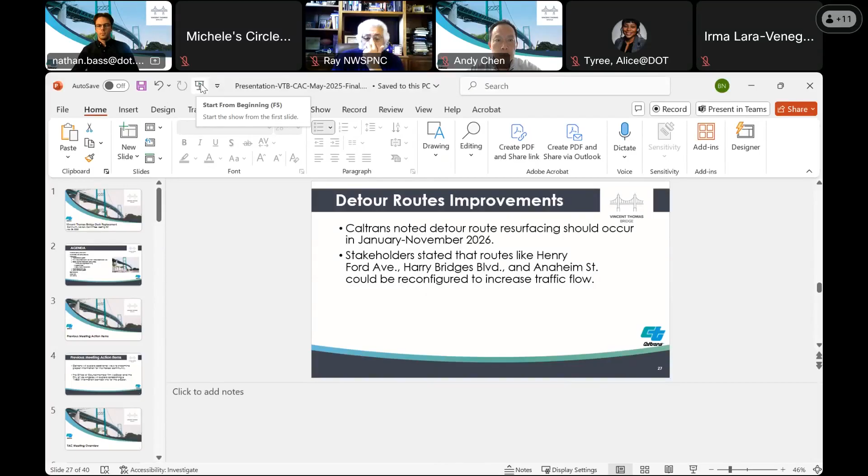And on your end, are you seeing the full screen of the PowerPoint, or are you seeing the presenter view? Presenter view. Okay.

All right. Is that better?

Good evening. Thank you for joining us for the 21st Community Advisory Committee meeting for the Vincent Thomas Bridge Deck Replacement Project. We have a very packed agenda, so I'm going to move on to the next slide and kick us off first with attendance.

So I'm going to run through... sorry, I'm working from a different desk than usual, so I'm going to have some technical difficulties on my end.

I'll run through the Caltrans personnel in attendance today. First, we have Diana Jimenez. Good evening, everyone. Diana Jimenez, Public Information Officer for Caltrans District 7.

Andy Chen. Good evening, this is Andy Chen. I'm the bridge construction engineer for this project on Caltrans.

Thank you. Wilfred Domingo. Hi, good evening everybody. Wilfred Domingo from Caltrans Office of Mobility Programs.

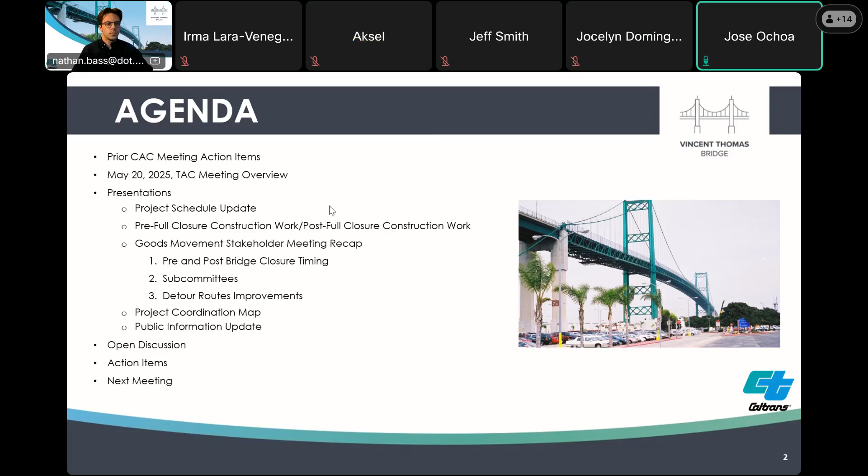Great, it looks like we have Michelle Grubbs, Circleback AI Notes joining us. I don't know if they'll say hi.

Nihar Desai, could you please introduce yourself? I think you just joined, so I'm putting you on the spot. Yeah, hi, Nihar Desai, I have property interests along Alameda Street, so I was invited by the council member to join.

Got it. Ray Regalado. Hi, Ray Regalado, community member, Northwest San Pedro Neighborhood Council President.

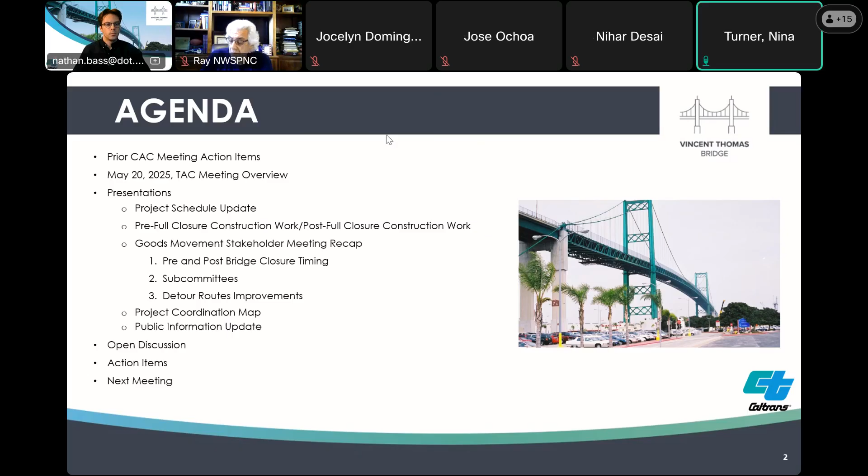Nina Turner. Good evening everyone. Nina Turner, Local and Regional Government Relations at the Port of Long Beach.

All right, thank you, I think that is everybody. And I hope you've had time to review the agenda.

We'll be going over first the prior action items from our prior CAC meeting in April. We will have an overview of the TAC meeting that we had last week.

And we'll have presentations over the project schedule, the pre-full closure construction work, and post-full closure construction work, the goods movement stakeholder meeting recap, which we talked a little bit about in previous meetings, is a sort of consortium at this point of different stakeholders from the ports, from industry, and different parts of government working on aspects of our project, like the TMP.

As you'll see, there's some sub-presentations within this goods movement stakeholder group recap, and they'll touch on the various subcommittees and issues that stakeholder group is covering. We'll have another update from our project coordination map and our efforts there, an update on public information, and then we'll have a discussion period after all those presentations, record any action items, and announce the next meeting.

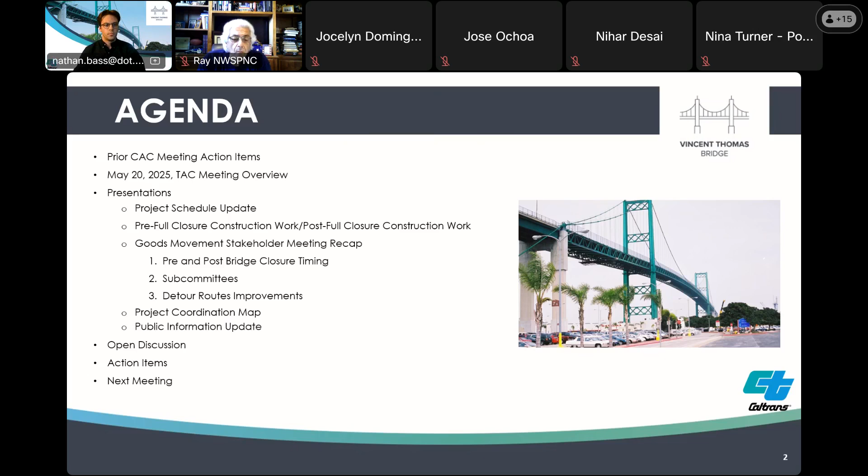In our previous CAC meeting, Ray and another community member mentioned their concerns about communicating with different communities within the harbor area, most notably in Wilmington and San Pedro. So we were to explore additional ways to streamline project information for the harbor community.

Since then, Diana Jimenez and myself have met with Ray Regalado and discussed different ways that we could get information into communities like his, and we're going to work together on an ongoing basis to figure out the right tools and frequency for communication there.

We also discussed the development of a 1-800 information line that residents could call during the closure, and the City of Los Angeles, through the office of Councilmember Tim McOsker, are working on that effort.

And Rimma, our project manager, will give an overview of our TAC meeting. Thank you, Nathan. At the May 20th Technical Advisory Committee meeting, we shared the following presentations: project schedule update, pre-full closure construction work, and post-full closure construction work.

Goods movement stakeholder meeting recap. We're going to talk about the same issues today. Project coordination map and public information update. Next slide, please.

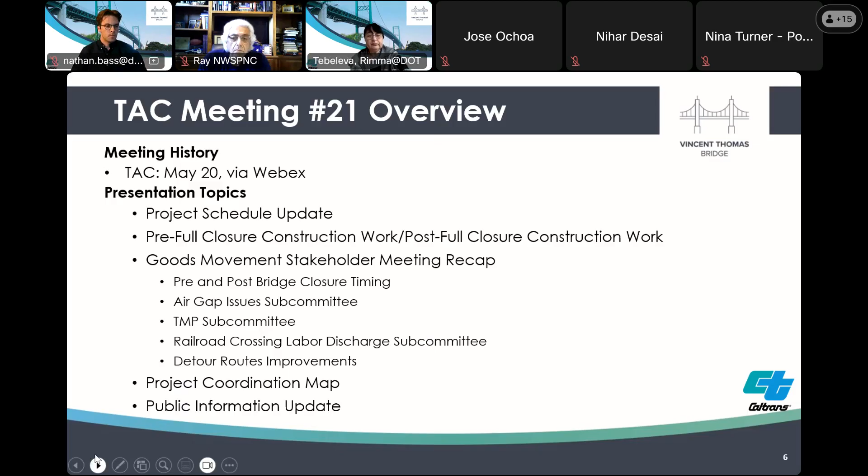We also discussed the following topics. The Metropolitan Water District mentioned that if construction is delayed for the Vincent Thomas Bridge deck replacement project, it could overlap with the Pure Water Conveyance project.

Northwest San Pedro Neighborhood Council's Ray noted that the Phillips 66 facility will be decommissioned during the deck replacement, potentially causing impacts to residents. Ray, I know that the Phillips 66 meetings with the neighborhood councils are happening this week, probably discussing project timelines, so later you can tell us if you know something about the schedule.

The Los Angeles Fire Department asked to meet with stakeholders to discuss emergency service planning for bridge workers on the deck replacement. They also mentioned they need more information about road closures for the detour route resurfacing plan for next winter, so the department can consider its resource deployment and preload data to its dispatch system, and we will be working with them.

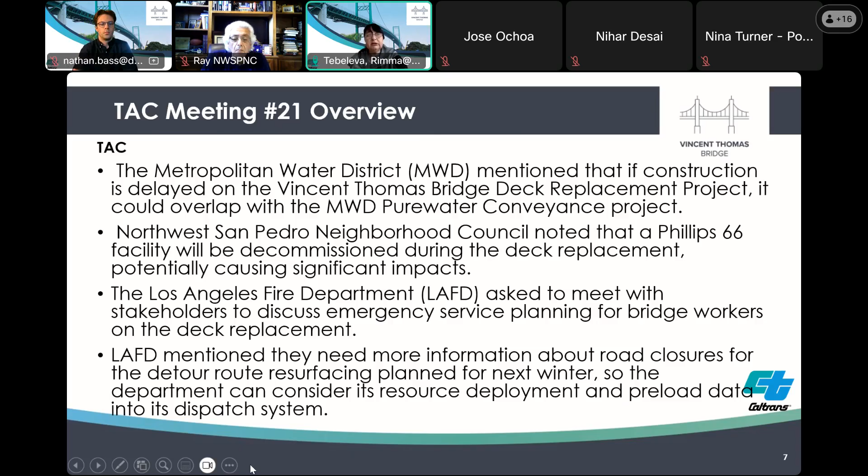Next slide, please. Project schedule update.

As you know, we started the environmental phase, or PA/ED, of this project in February 2023 and completed it in fall 2024. Currently the project is in design phase, which will be completed in late summer of this year. Construction will start in late winter of this year with pre-full closure work, completed in fall 2026. The full closure will begin in fall 2026 and end in winter 27-28. It will last up to 16 months.

The post-full closure phase will begin in winter 27-28 and will be completed in approximately one year, in winter 28-29. Next slide, please.

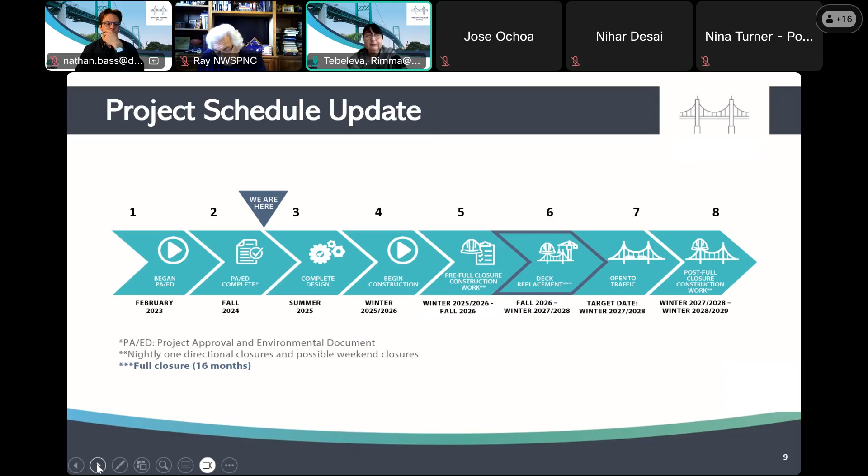We will resurface the detour routes between winter 25-26 and fall 2026. The pre-full closure construction work, as I already mentioned, will be done between winter 26 and fall 2026. It will require one-directional night closures and possible one-directional weekend closures.

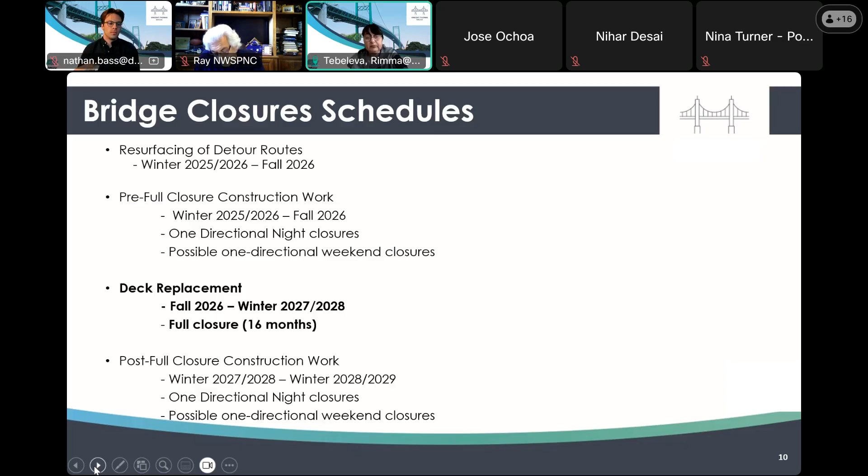The full closure, or deck replacement itself, will begin in fall 2026 and will be done by winter 27-28. Post-full closure construction work will be done between winter 27-28 and winter 28-29. It will also require one-directional night closures and possible one-directional weekend closures. Next is Andy to talk in detail about all these construction phases.

Thank you, Rimma. Once again, my name is Andy Chen. I'm the bridge construction engineer for this project. Before I start, can everybody hear me fine? Good, thank you. So for the next few slides, I'm going to talk about — sorry, back to the previous slide, please.

For the next few slides, I'm going to talk about the pre-full closure and also post-full closure construction work, such as what kind of work we need to do before the full closure and what kind of work we still need to do after the bridge is open to traffic. In the end, I will talk a little bit about the construction sequence during the full closure work, which is the actual deck replacement work.

Next slide, please. So here are the main tasks for the pre-full closure construction works. First, we're going to install the temporary elevators—this time we're going to install two of them, and I'll show you the location later—and also two stair towers. Those temporary elevators and stair towers, their main purpose is to give access for workers from the ground to the bridge.

Then we're going to install the temporary protective shielding, which is to protect the waterway and everything underneath the bridge, such as the public and businesses. Then we're going to install the temporary access platform, which gives workers access underneath the deck. We are also going to install the temporary bracing on the approach and suspension span, which ensures the bridge is still stable during construction, especially after the deck is removed. And of course, we're going to resurface the detour routes per request. So those are the main tasks we're going to do during the pre-full closure construction work.

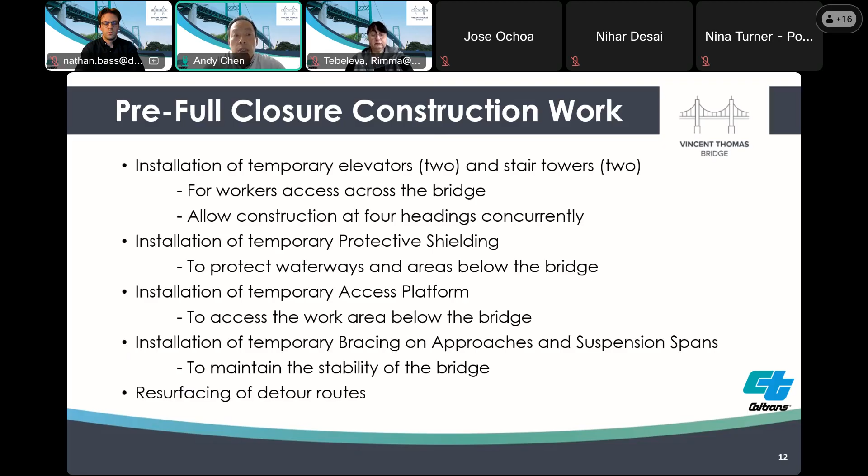Next slide, please. As for the post-full closure construction, there are two types of work: one is permanent, one is temporary. For the permanent work, we're going to support the utilities under the deck and hang utilities on permanent supports, because some utilities might be disassembled or relocated for construction purposes. We're also going to install the new drainage system at the seismic joints. So those are the permanent works.

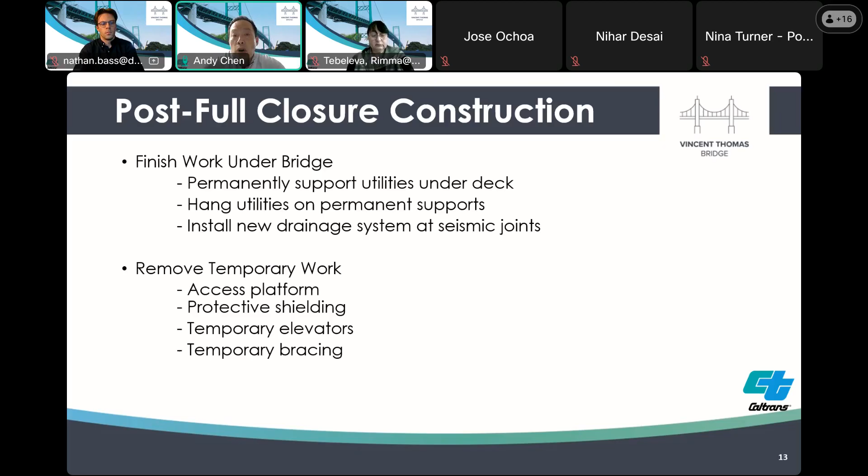As for the temporary work, we're going to remove everything we mentioned during the pre-full closure construction, such as the access platform, protective shielding, temporary elevators, and temporary bracing. So those are the tasks we still need to do after the bridge is open to traffic. Next slide, please.

Here's a picture of the elevator we installed next to the Vincent Thomas Bridge in 2011. This time we're going to install a similar one, located at Bent 9 and Bent 14, one on each side of the Main Channel. Those elevators are essential because they not only provide access for workers from the ground to the bridge, but also reduce the number of trucks on the bridge, since workers can park their truck next to the elevator and use it to get on the bridge. We all know that Vincent Thomas Bridge is a very narrow bridge, so we need all the space we can get for an efficient operation.

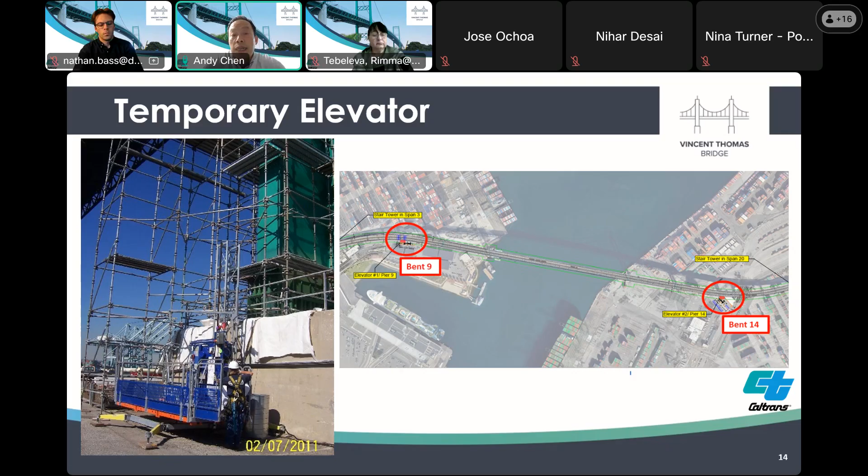Another way to maximize the space on the bridge is to utilize the gantry crane instead of the conventional crane, which will take up all the space on the bridge. So during the deck replacement, we are going to use the gantry crane for the removal and replacement.

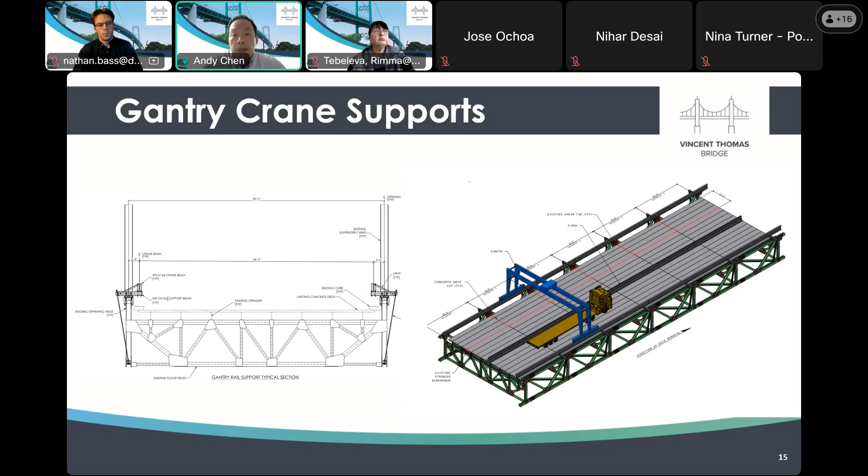Here is a picture taken in 2011. This is the protective shield I was talking about earlier. We are going to use a similar shield this time for the Vincent Thomas Bridge deck replacement project, covering the entire underneath of the bridge. For this kind of work, we need one direction closure, night closure every night. The contractor will assemble those platforms on top of the bridge deck, and once ready, lower the platform with a crane and install it underneath the bridge, as shown on the right-hand side of the picture.

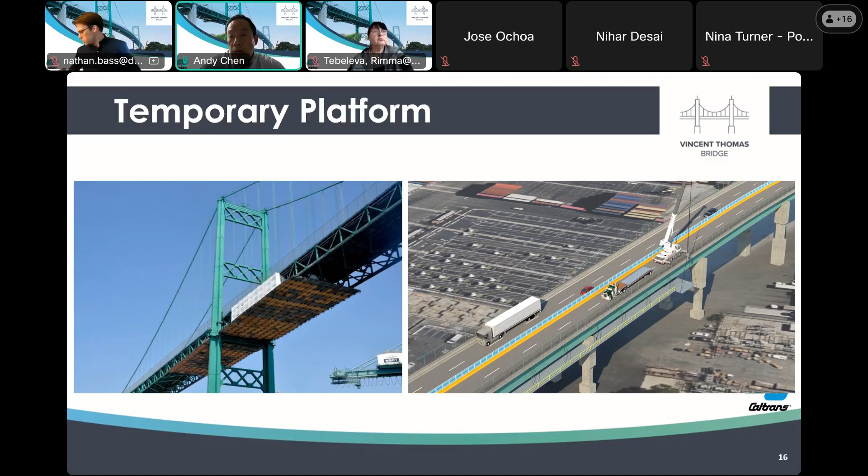Here are some more pictures of the protective shielding, just to show you that we utilize this kind of shielding a lot on various bridges. So we have a lot of experience installing those shieldings.

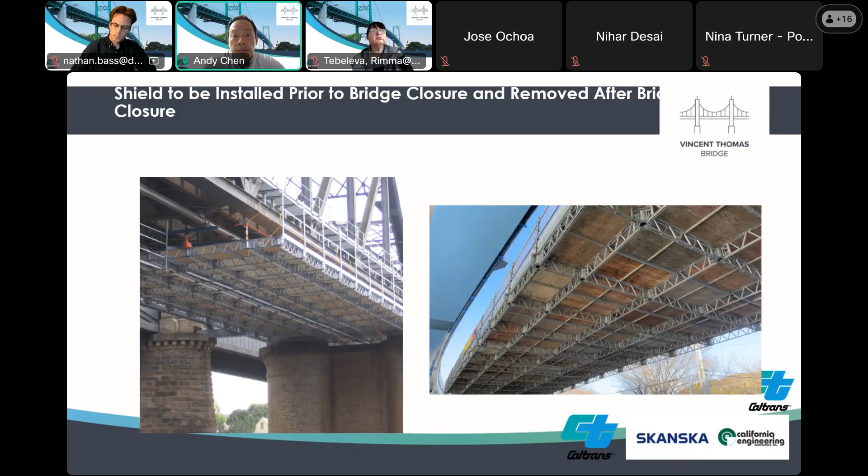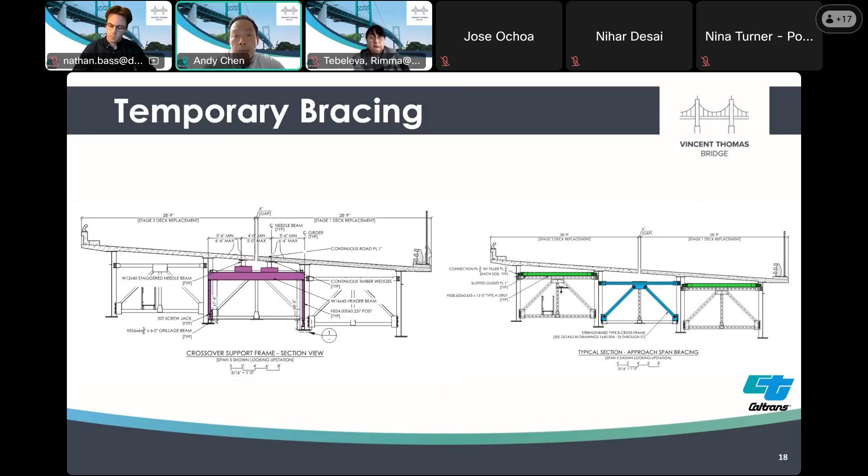Those were the works we need to do during the pre-closure and also the post-closure. For the next few slides, I'm going to briefly talk about what we're going to do during the closure. Of course, we're going to replace the bridge deck, reconstruct the bridge railings, reconstruct the median barrier, reconstruct the drainage, replace the seismic sensors, and reconstruct the overhead sign.

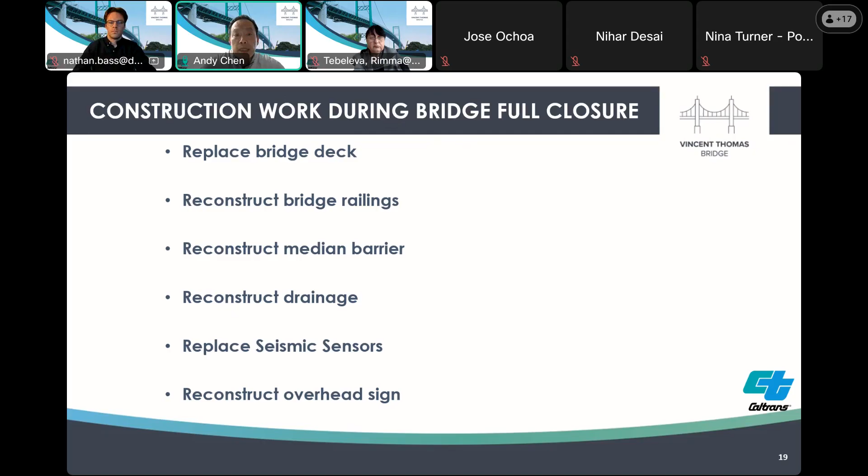Here's a demonstration of how we're going to do this work. We are going to start from the eastbound first. This is step one of the eastbound. For the next few slides, blue means things we're going to put in for this step, and red means things we're going to take out during this step. For example, step one at eastbound: we're going to install the gantry rail brackets, install the gantry rail, and then remove the existing railing.

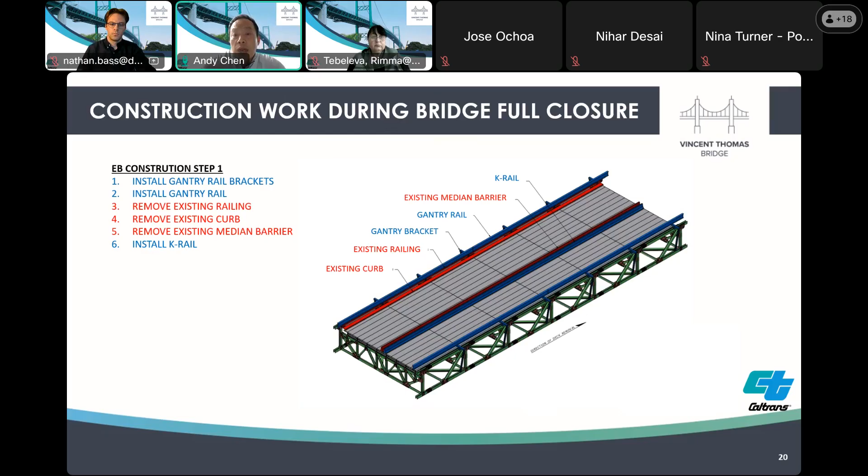We're going to remove the existing curb, remove the existing median barrier, and then install the K-rail to separate the eastbound and westbound. The eastbound will be the working zone and the westbound will be the access zone.

For step number two, after we install the K-rail, we're going to cut the existing deck into 6 segments at each span. Once it's cut, we are going to remove those existing deck segments one by one with the gantry crane, load them onto the truck, and ship them out.

After we completely remove the deck from the span, we are going to install the precast concrete panels with the gantry too. We'll pick them up from the truck and load them onto the bridge.

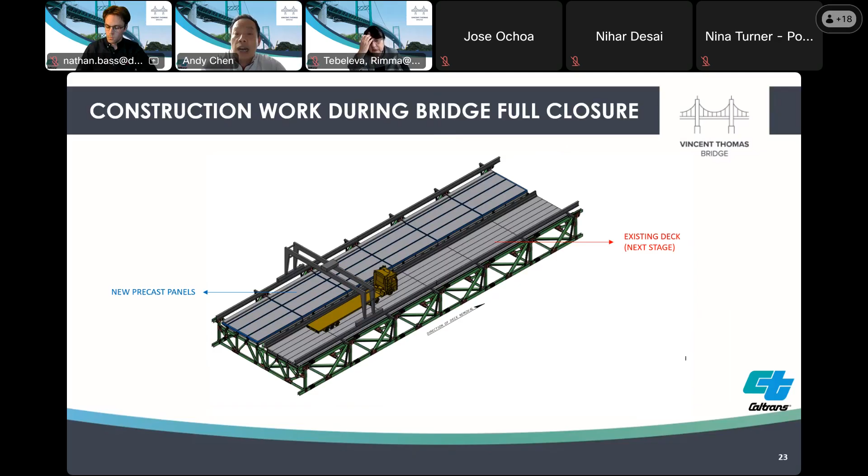After the eastbound is done, we will have the new precast deck panel on the eastbound, and the next stage will be the westbound, which still has the old deck.

For the westbound, we're going to follow the exact same steps as the eastbound. First, we're going to remove the barrier, remove the median barrier, and install the K-rail to separate the construction zone and access zone. We're going to remove the deck one by one and pick it up with the gantry, then install the deck one by one with the gantry too. So the steps are exactly the same as the eastbound.

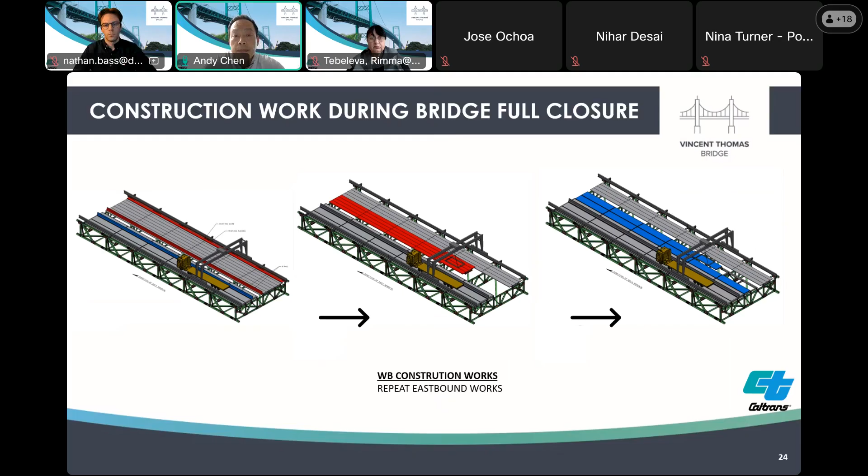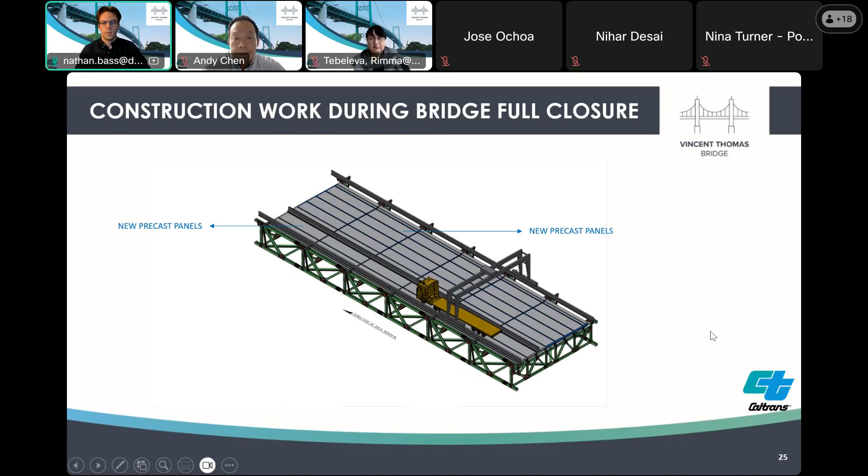Here's a recap of the goods movement stakeholder meeting, which has been organized in large part by Pacific Merchant Shipping Association and the city council member for the 15th district, Tim McOsker. The group had discussions pertaining to detour routes. Caltrans noted that resurfacing on the detour routes will take place throughout 2026, potentially starting even at the very end of this year. Stakeholders stated that routes like Henry Ford Avenue, Harry Bridges Boulevard, and Anaheim Street could be reconfigured to increase traffic flow.

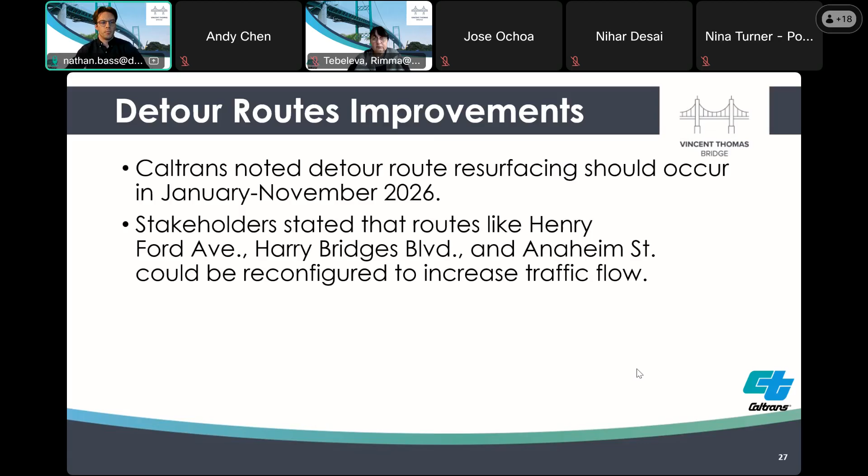Relating to the timeframes that our contractor will be working in those pre and post full closure periods for the preliminary or temporary works that Andy described, the group at its most recent discussion discussed changing the previously proposed time to 10:45 p.m. to 6:45 a.m. for westbound and 10:15 p.m. to 6:45 a.m. for eastbound. That provides a longer work window, which is more

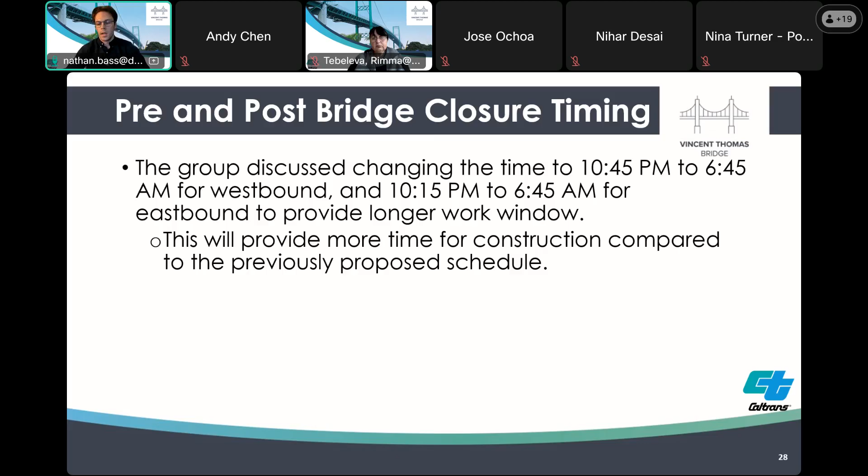economically and time efficient for Caltrans and the public. And to remind viewers, this is the timeframe for nightly closures before and after the deck replacement.

Relating to the air gap consideration on the project, Caltrans confirmed that there will be a 2.5 foot impact to the air gap throughout the pre and deck replacement stages of construction. It will be one of our first tasks after finishing the deck replacement to remove all of the protective shielding and mitigate any impact to air gap from our construction.

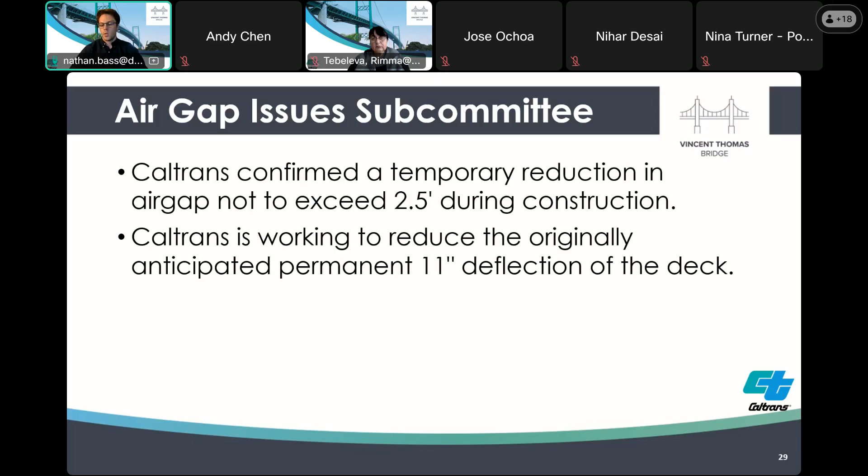We also noted that there will likely be a permanent 11-inch deflection to the deck because of the weight of materials used in construction, and we're working on mitigating that as well, so that there will not be a long-term impact to shipping or access to the channel.

A subcommittee as part of the Goods Movement Group is covering the traffic management plan. It's being formed to discuss the CCTV network and traffic control locations under consideration by Caltrans and the port, as well as the port systems or port complexes and the harbor, as well as public notification strategies and 24-hour incident response along the detour routes.

There's also a conversation about traffic control officers that Caltrans hopes to deploy with the assistance of LADOT and local law enforcement agencies. We've identified 26 intersections where those traffic officers could be deployed during the closure schedules. That's not necessarily 26 intersections where there will be traffic control officers deployed, but those are areas we've identified so far. Participants requested that Caltrans consider developing a mobile application similar to the one that Long Beach created for their Gerald Desmond Bridge replacement project.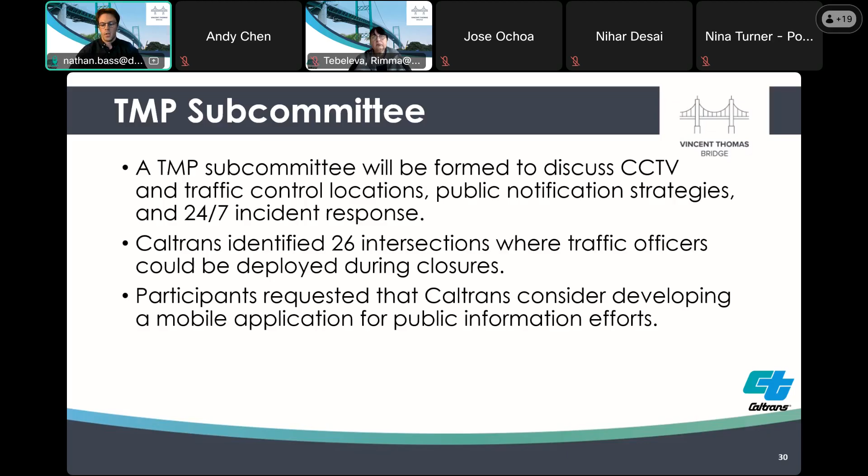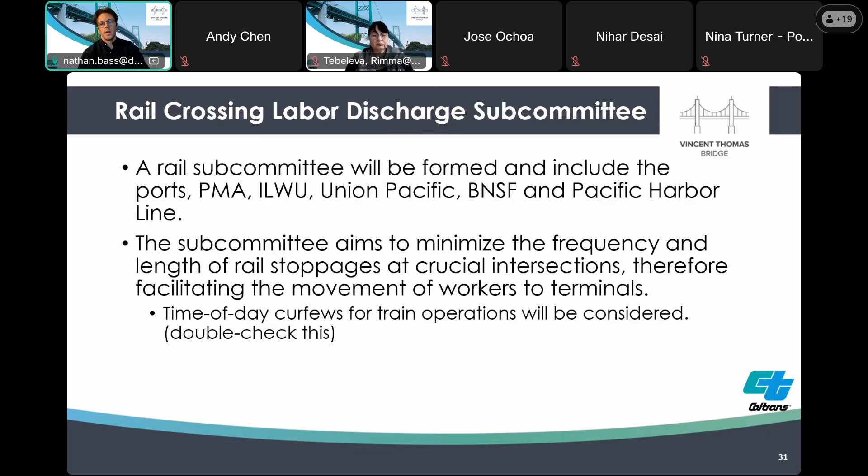There's another subcommittee as part of the Goods Movement stakeholder group working on rail crossing labor discharge issues, which is mostly having to do with getting port workers and terminal workers to their place of work against the heavy burden of traffic during our closure. Participating members of that subcommittee are PMA, ILWU, Union Pacific, BNSF, and Pacific Harbor Line.

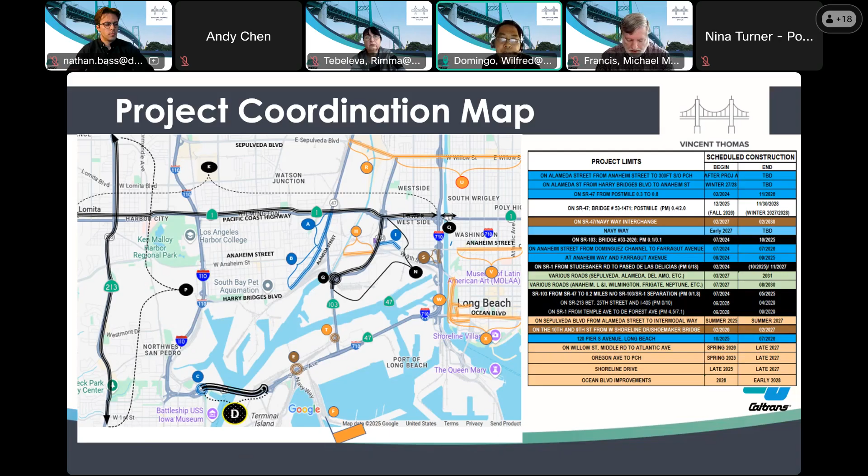Next slide please. So this is our latest project coordination schedule. Just as I stated, we've been working with the consultants on Project E, the SR47 Navy Way Interchange project. That's the latest schedule that they have: it's going to start February 2027, and then it will end in February of 2030.

But the good news also on this one is, due to our coordination, we found out that there will be a less than significant impact with this project. Again, Project B, the Alameda Street South Improvement Project, is now being delayed until after the full closure. So that's good news for everybody.

The other thing that was mentioned by Rimma during the TAC meeting is the decommissioning of the Phillips 66 refinery. It's still not here because we still don't have any information on their traffic handling or anything that will have impact on the Vincent Thomas Bridge project. Once we get additional information for that project, I will certainly include it here if it has a significant impact. So this is our latest coordination map and schedules right now. Thank you.

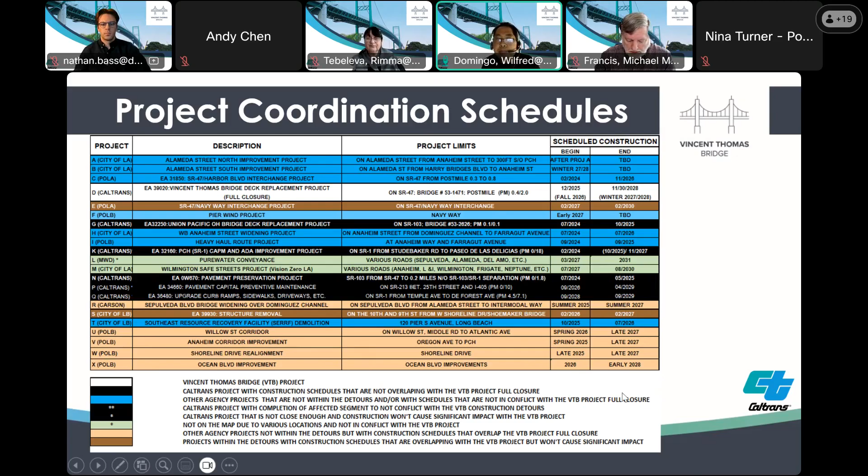In the Public Information Office, we're asking members of the community to join a list for text message notifications. This is a way that we'll be able to issue information in real time. This will complement other efforts that the department has in sending out notifications as advertisements to mobile users and internet users, both on computer or phone, as well as different social media and traditional media efforts to get the word out about traffic, detours, and other things people want to know about our project.

All right, so we'll move into the open discussion part of the meeting, and I'm going to stop sharing my screen for now. We have a few members from the community. Would anyone like to make comment about the presentation or have questions about the project?

I see Ray has his hand up. Yeah, it came to mind that much of this construction will be occurring overnight—will there be a higher level of noise being emitted from the bridge? We don't have a lot of residents around, but there are some that are close. So I'm wondering if the noise being emitted might have to be discussed with, or warning given to, the residents, and maybe even some of the workers that are there overnight.

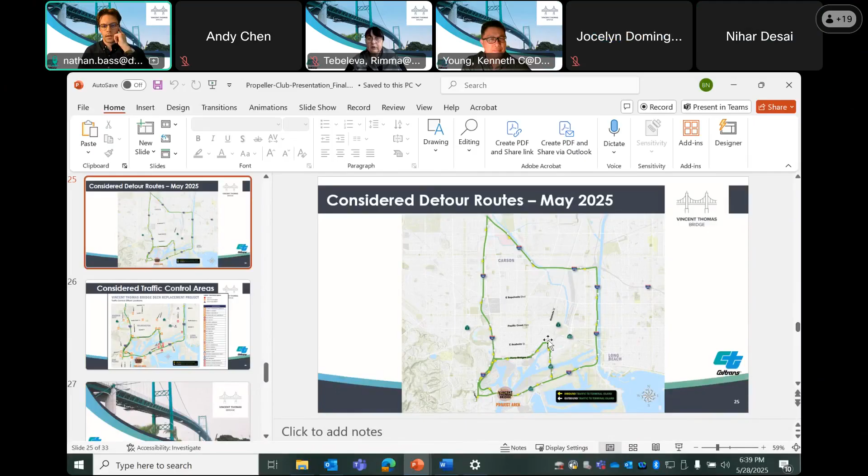Right here is Anaheim. It takes a hook right or a left onto or from Anaheim.

All right, is there anyone else? And Nihar, could you please share your email in the chat for us, in case we don't already have it? Yeah, I'll do that right now. Thank you.

All right, I think that might do it for discussion. Joyce's hand is still up. Pardon me? Jocelyn Domingo, yeah, I think that they've not lowered their hand since their previous time. People are not used to WebEx and its features. Okay.

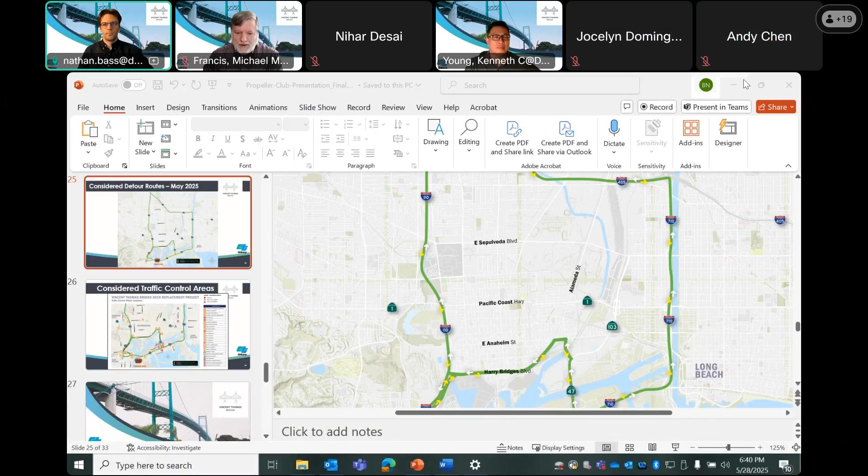So, onto action items. We have a few. The first one being that we'll always make a recording of the minutes and upload this recording to our project website over the next week or so. And I think two agenda items I heard were: provide Nihar with a copy of the detour map, and also probably follow up with the mayor's office about communication to residents in the affected area of the project.